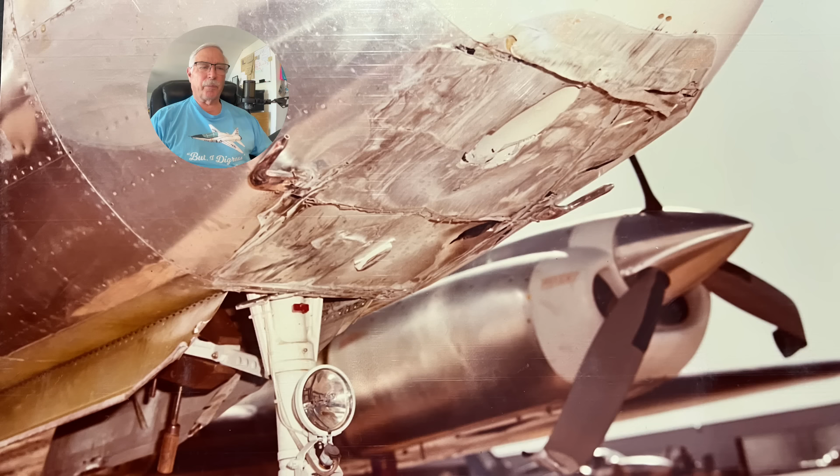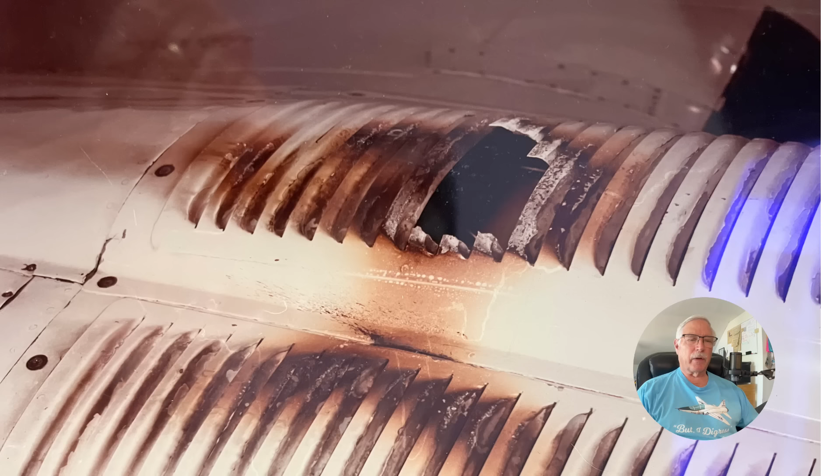Of course, I get hired by the airlines. I get furloughed. I'm working for Cessna Flight Test, and we had a little problem with the hydraulic system, a poor flare, and I talk about this in another video. But ended up sliding a 404 on its nose to a stop at Wichita, and that's fine, no problem with that. My very last flight at Wichita before I went to a flight test at Boeing involved a fire on the 421 that burnt through the engine cowling. Well, fine. Didn't get a rise out of her.

But the guy who owned it sold it. A guy restored it, and unfortunately, on his first test flight, he didn't realize that he had wired the ailerons backwards. So he had reverse control, didn't do an adequate flight control check before he took off, and with the reverse controls, he ended up crashing and killing himself. Well, okay, that's fine. My wife always considered me a good pilot, so she didn't worry.

Later on, I said, hey, NASA invited me to come out and do a flight test on the F-18 with them. I'm going to fly with Gordon Fullerton, a two-time shuttle astronaut, and okay, that's fine, no problem with that. But when it came to the IPTN 250, she says to me, I'd really prefer that you don't fly that aircraft.

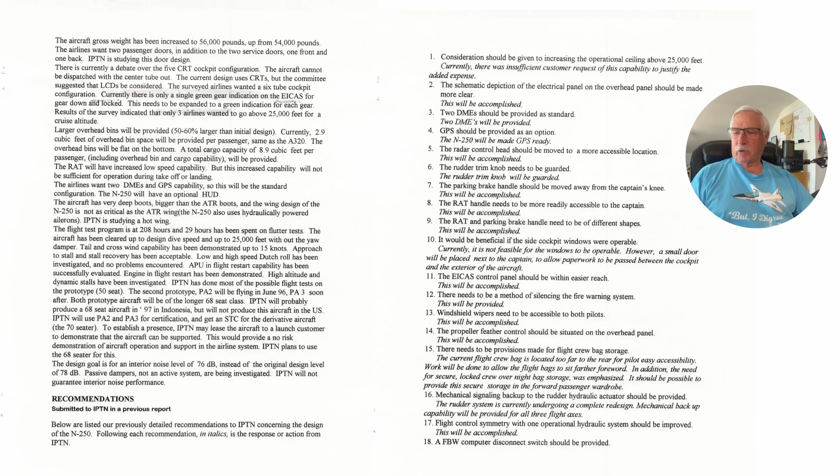Another issue was the interior noise level was high. They were using turboprops, and you can get pretty good noise reduction, but they were having a noise level problem. The design was at 76 dB, and the original design level was 78. Now 2 dB isn't a doubling of the power, but that difference is a lot more significant than it may sound like.

Some more items we addressed: the schematic display of the electrical panel on the overhead panel, where you had control of it, was really not easy to follow, and it was almost kind of deceptive. So we said, you guys need to clean that up, and they agreed to do that, and we gave them some ideas on that.

They only had 1 DME provided. We said you really need 2. This was the year before GPS was really coming into its own, and we said GPS should at least be provided as an option. They said, hey, we'll do 2 DMEs and we'll provide GPS as an option, and make it GPS ready. The radar control head is way back here.

The radar control head was very difficult to operate, even for the captain, and especially for the first officer. Interesting thing was they had a rudder trim switch, and you could place a flight manual or book or anything on that and actually activate the rudder trim. So I said, no, that's really bad. You need to provide a method of guarding that, so you don't have that.

The parking brake handle was next to the captain's knee, very hard to operate. And you'll love this one: they needed a method of silencing the fire warning system. If the fire warning system goes on in their present design, there's no way to silence it. That thing's just going to keep on going, I guess, until the fire goes out. But there are a lot of times you get extended fire warnings because it takes a while for the system to cool down, and it can be several minutes. You don't want that bell going off the entire time.

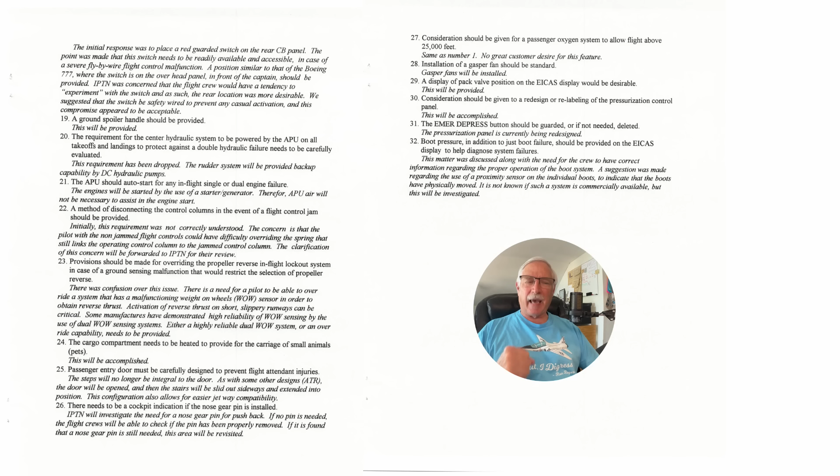You safety wire it. So if the safety wire is broken, you can come and talk to whoever did that. There was no way to activate the ground spoilers other than automatically, and we said you need a mechanical handle so that once they're on the ground, if the pilots want the ground spoilers, they can get them in case there is a malfunction, because that's not an unheard of problem.

And the rudder system will also have backup DC pumps in addition to the manual backup. We also said that the APU should auto start in flight for any single or dual engine failure.

They were a little bit hesitant on that, since they had the batteries, but we said it's not uncommon for the system to be designed so that if you have a dual engine failure, you get the APU online as a backup system.

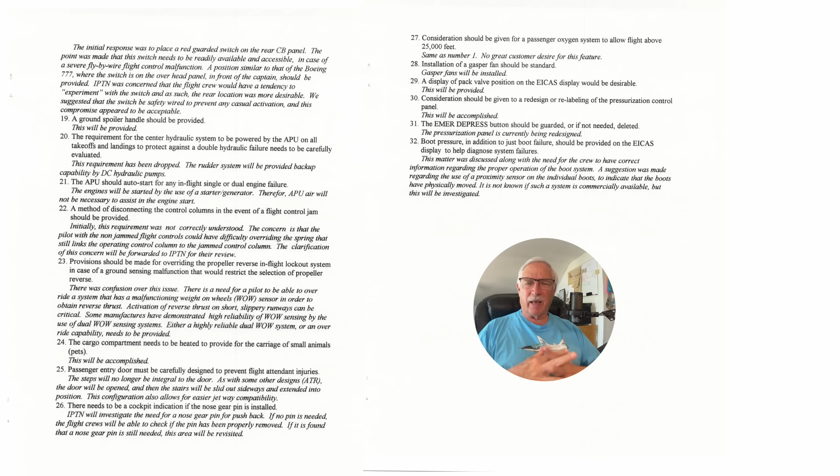Also, the cargo compartment needs to be heated in case anybody is carrying small animals. And there was an issue on the cabin door, the way the steps were kind of integrated, that we thought it would be very easy for a flight attendant to injure themselves, the way certain aspects of that step stuck out in the door.

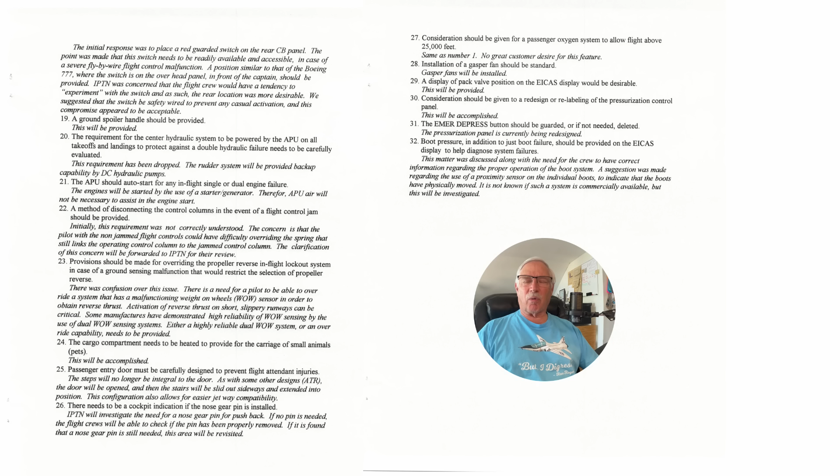Oh, and another fun thing - I'll show you this on the overhead panel - the emergency depressurization button needs to be guarded. You could be reaching your hand up there to activate something and inadvertently press that, and if you're cruising along at 25,000 feet and you hit the wrong button and depressurize the cabin, that is not going to be a good thing.

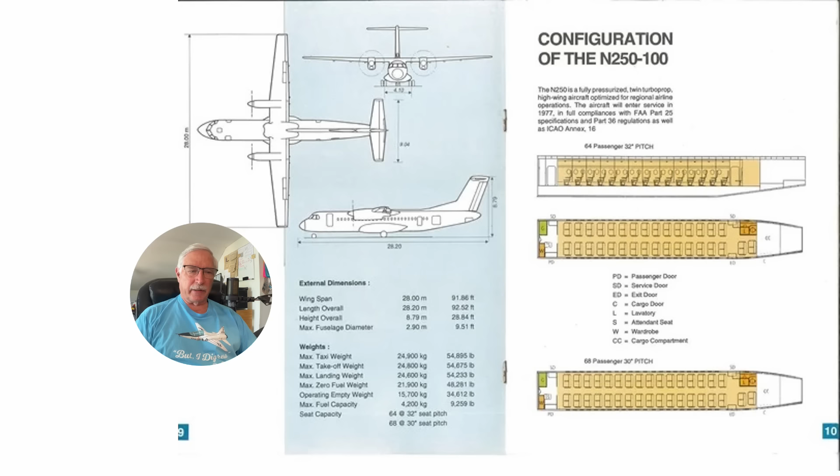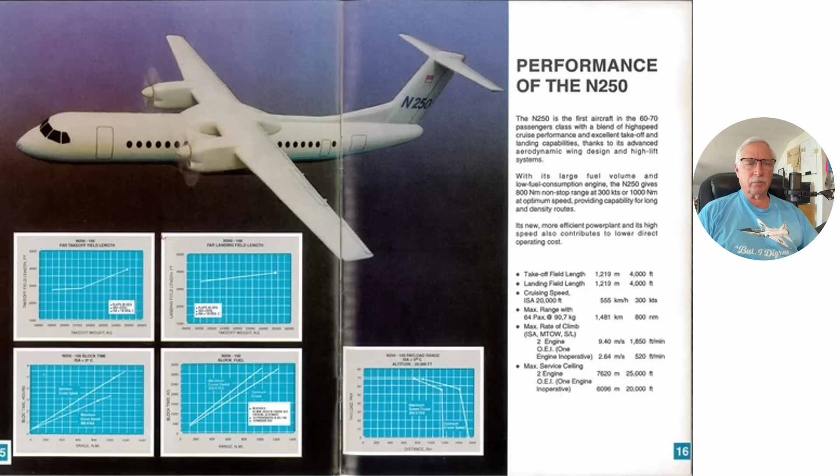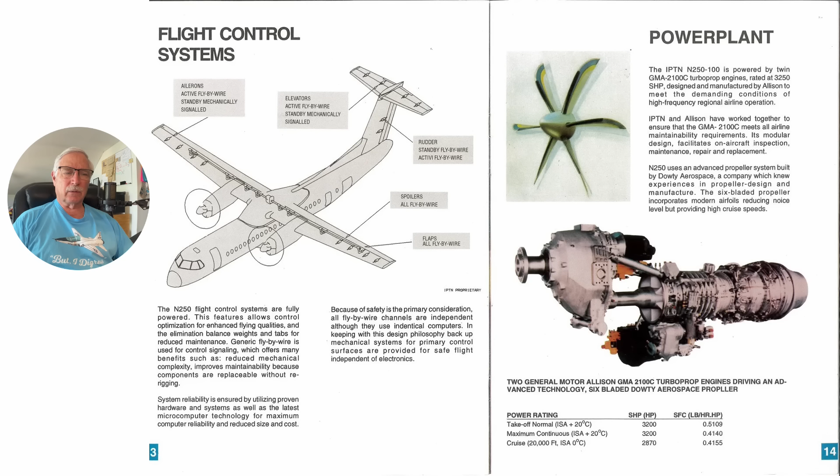And again, getting into the flight control systems, I'll talk about this in just a second - they needed a lot more work. There's the power plant with the six-bladed prop, and there's another picture of it. As far as propellers go, very beautiful.

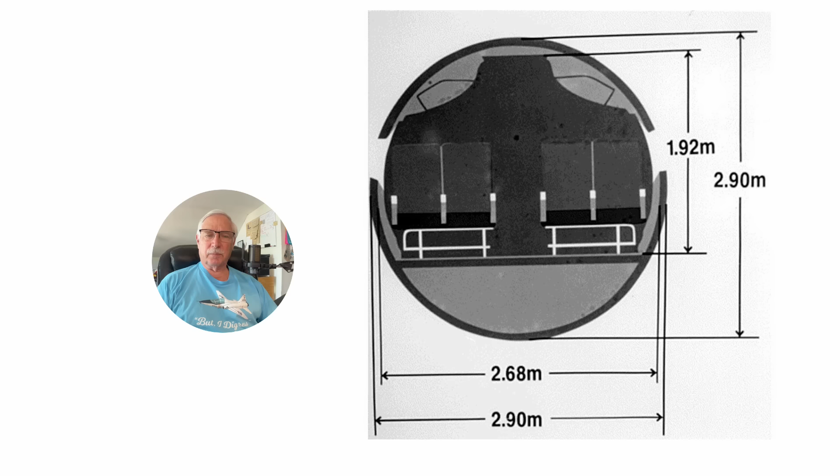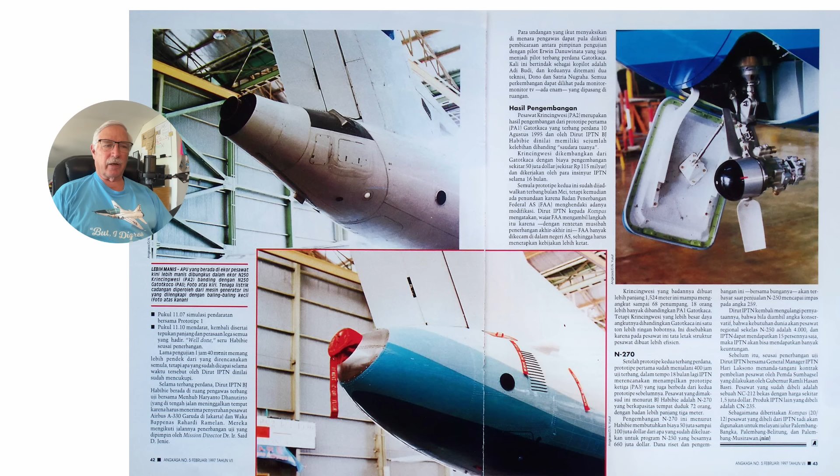The basic interior cabin design, and there's some more pictures. They're comparing it to larger aircraft that have small seating arrangements, if you will. There's a picture of the APU in the tail end, and there's the ram air turbine that's been deployed. And again, the basic outlay.

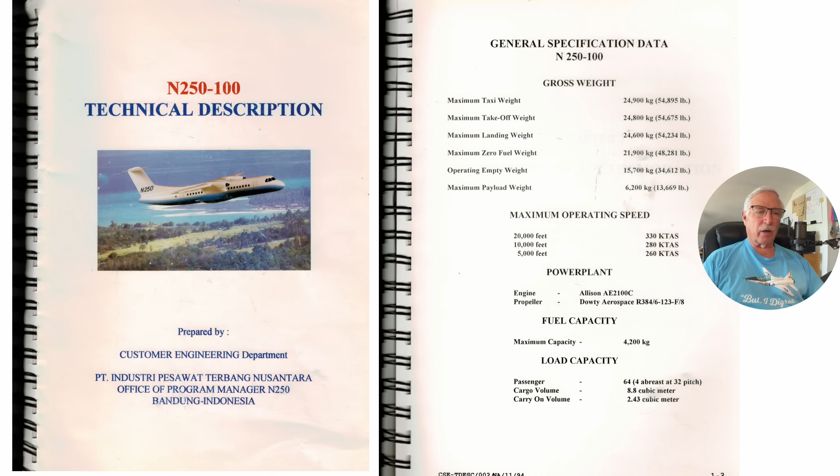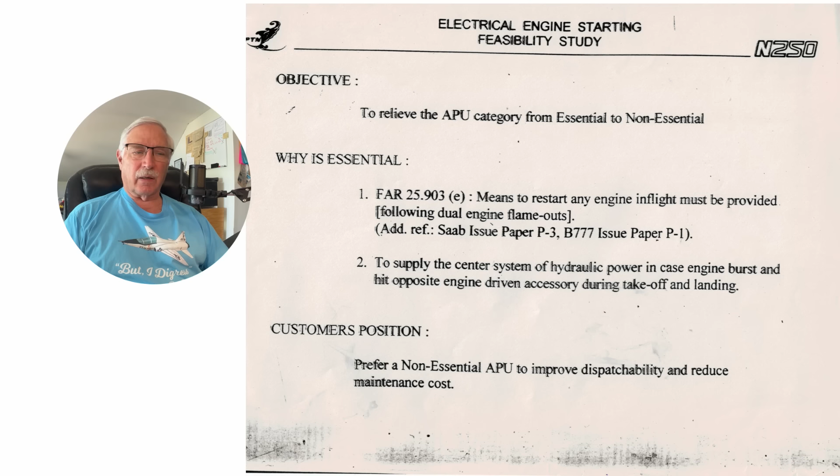So we get into the technical description here with the various parameters for the aircraft that you can look at if you're interested in. And of course, I talked about the ability to start the engines if you have an in-flight engine failure, and a dual engine flameout. You need a way to restart those. And also they needed a way to supply the center hydraulic system in case you had an engine problem. And that had not been developed at the time.

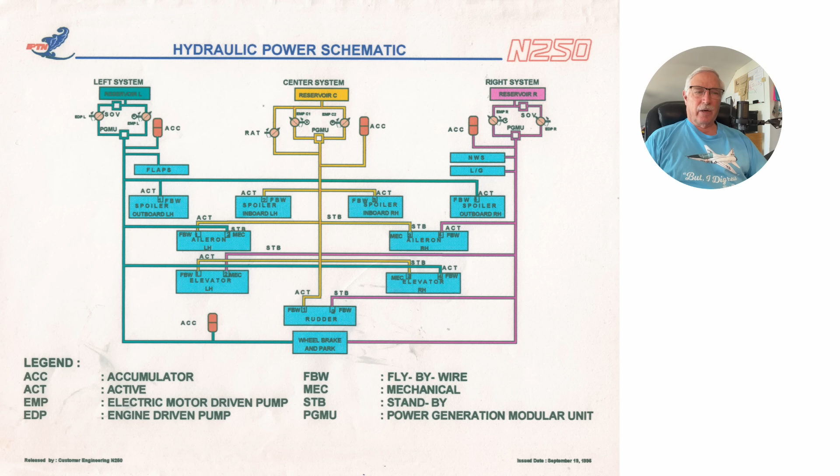Now this is the new and improved system, but for most of you familiar with this type of design, you'll notice there still is not a horrendous amount of backup here. Two hydraulic systems going to the rudder, which would be an extremely flight critical component if you have an engine failure, because big propellers like that need a lot of rudder to control it, and they really should have three systems.

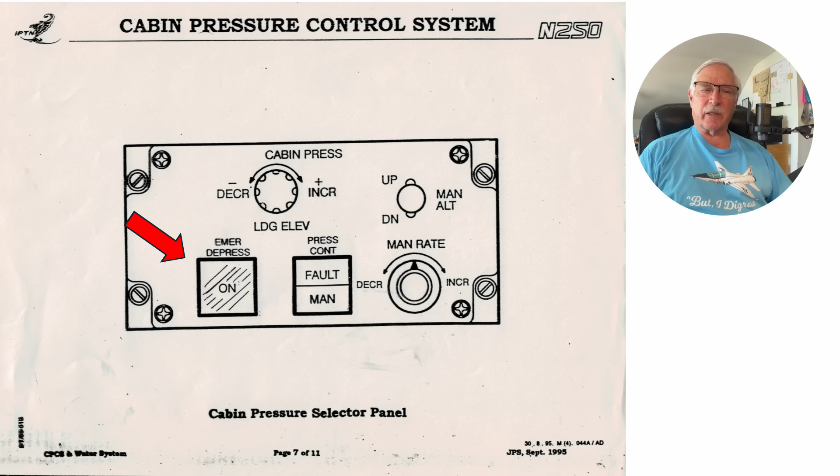Oh, and here is a fun little aspect. The depressurization switch here, emergency depressurization switch, was not guarded. So if you were moving your fingers around there, you could possibly inadvertently press that switch. And of course, if you're cruising up near 25,000 feet, that's not going to be a good thing.

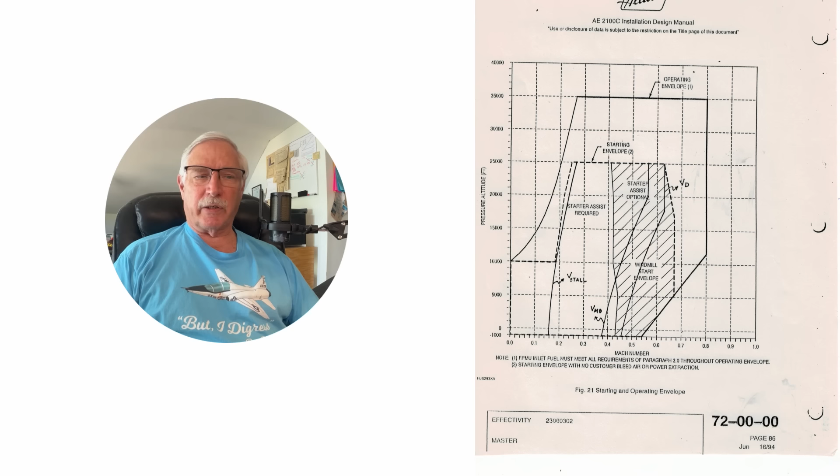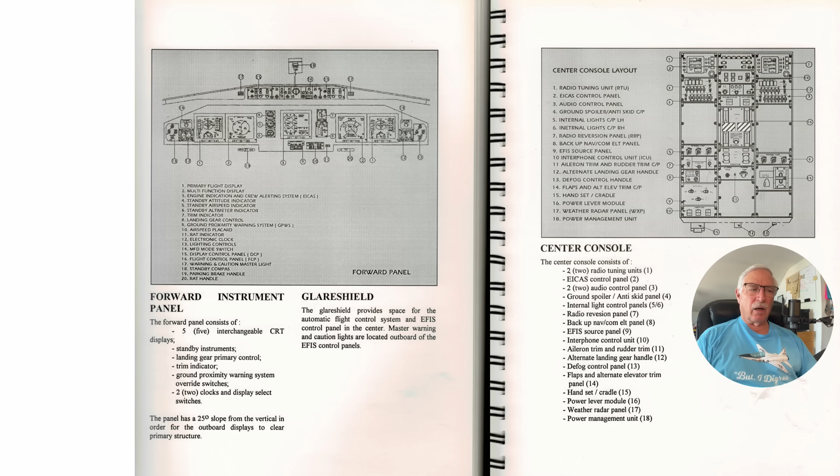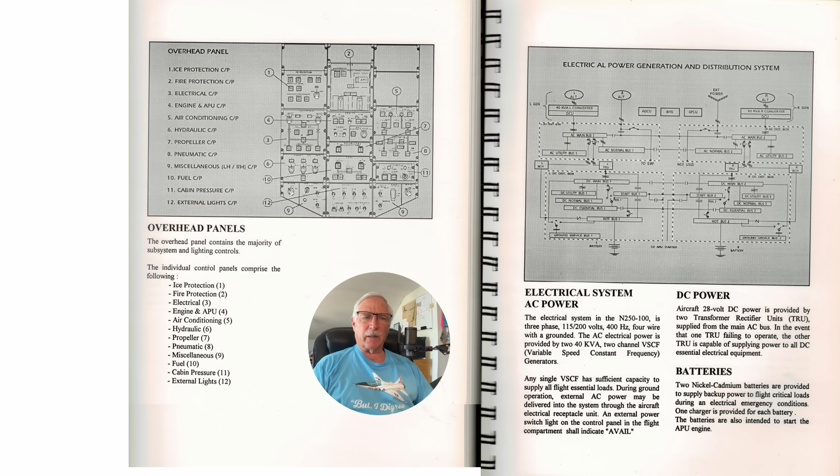And the layout generally wasn't too bad. We had a lot of recommendations. Things were just not convenient, and they could do a lot better positioning of various components on the forward and center console. And then the overhead and the power distribution system wasn't too bad, but the display on the overhead panel is just not very intuitive.

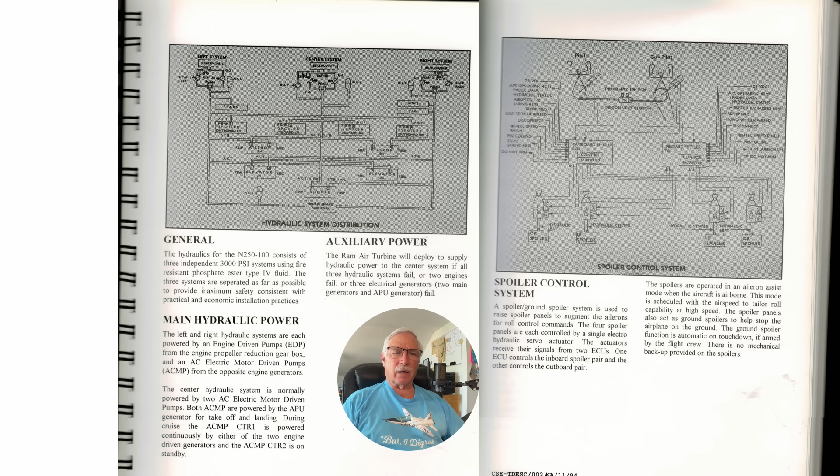And here is, of course, a picture - I gave you a better picture of the hydraulic system there, and also the various systems here with the spoiler controls. At the time, they did not have any manual backup for this. It was all hydraulic. And we said, you really should have something more than just fully hydraulic back control of these systems without any way of manually backing it up in case you had a fly-by-wire system problem or a hydraulic problem.

Now, like I said, they had one of these flying, and the whole program shortly after we were there came to a halt, and nothing more was accomplished. And it's probably good. I mean, they were making a lot of improvements on this, and over the years they tried to resurrect this thing, and it was never successful. Finally, in 2000, they shut the whole program down.

Indonesia is definitely a third world country. There's no other way to say it other than that. When you're out, you see a guy riding with a bunch of dead chickens hung over the handlebars, taking him to a restaurant.